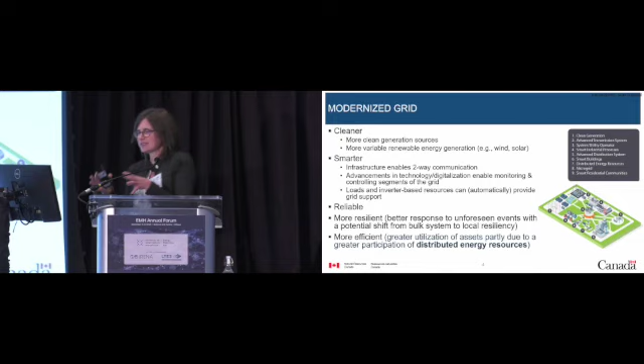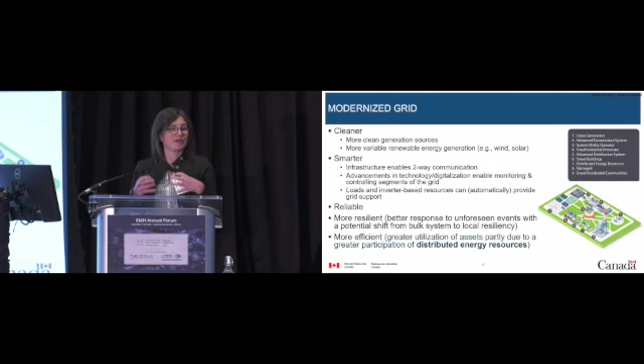And loads and inverter-based resources can not only provide grid support, but they can do it in an automated way. So the modernized grid hopefully is still reliable and we're still able to keep the power on, but it's also hopefully more resilient, so better response to unforeseen events, and maybe we shift a bit our mindset when it comes to resiliency from the bulk system resiliency to more local. And the more modernized grid is also potentially more efficient, so we have a better utilization of the assets of the network because we enable DERs to participate.

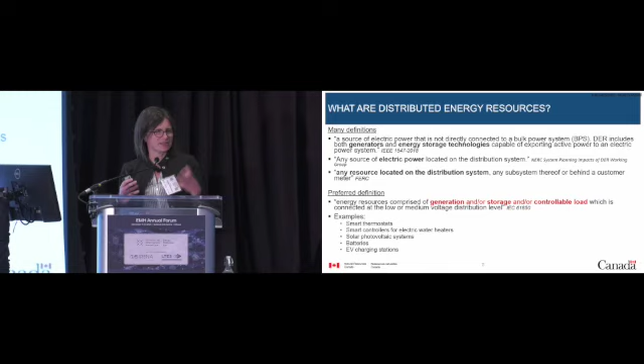So let's take a minute here to define distributed energy resources because it's not always defined the same way. So sometimes we see it includes generators and energy storage technologies on the distribution side. Sometimes it only includes electric power sources. But here what we will use as our preferred definition is any resources. So we include generation, we include storage, and we include controllable loads on the low voltage and medium voltage distribution side.

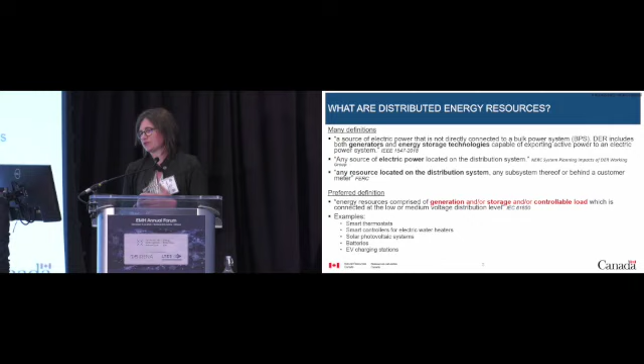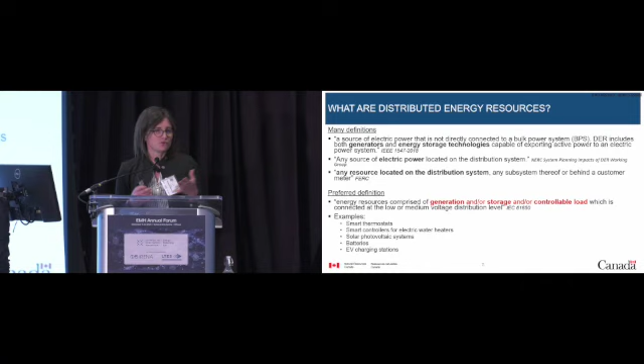So what does that include? Well, smart thermostats that control electric baseboard heaters, heat pumps, smart controllers that control electric water heaters or any other loads, solar PV systems on the distribution side, batteries, and EVs.

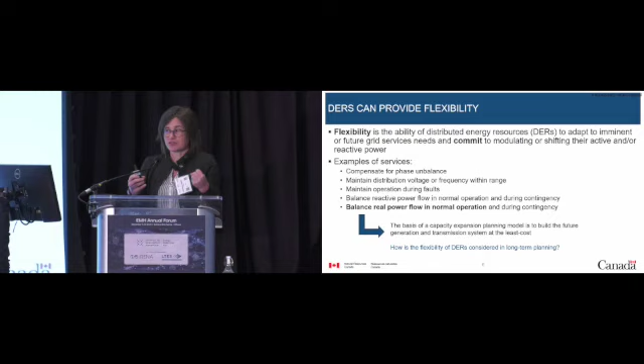And why are DERs important? Because they can provide flexibility. And what is flexibility? It is the ability to adapt to grid changes, so to grid needs, and commit to shifting the active and/or reactive power to help to provide that service. And the services are numerous. So you have compensating for phase unbalance, maintaining distribution voltage or frequency within range, maintaining operation during faults, balancing reactive power flow, and balancing real power flow in normal operation and during contingency.

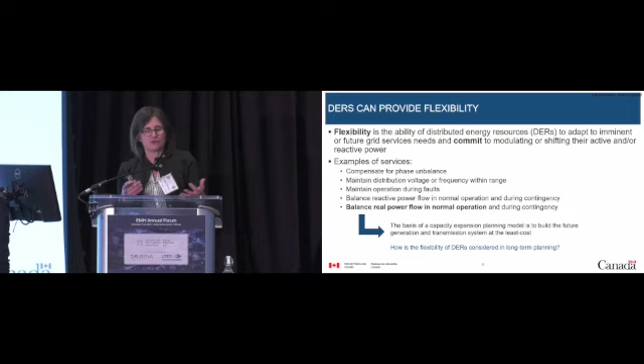And that last one is in bold because it's important, because when we're doing a capacity expansion planning model, we're actually balancing real power flow either for the full year or for certain weeks or for certain days. And we do that and we try to find the system of the future at the least cost. So if DERs can provide flexibility and can help balancing real power flow, it would make sense to try to capture that in long-term planning.

So how do we currently do it? So let's look at the three components of DERs. So starting with distributed generation. Well, right now, distributed generation, if it's significant, we'll consider it, again, by using the concept of net load, so load minus distributed generation. That net load is time and resource dependent, so it changes, but it's an input, it's static, it's passive. Distributed storage, well, if it's significant, we'll include it by aggregating it at the closest bus. And we will somewhat consider the performance characteristics.

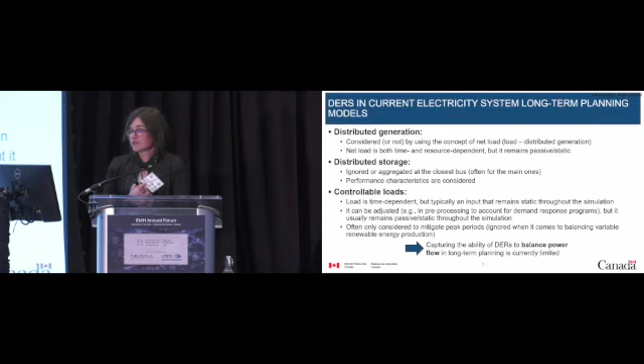When it comes to load, well, the load, of course, is time dependent, but it's also typically an input that will remain static throughout the simulation. We'll often adjust it in pre-processing, accounting for demand response, but often that will be only at the peak. We'll say, okay, well, that much demand response will help the peak, so we will adjust the load curve in pre-processing and then use that. We won't account for the fact that it can actually vary throughout the simulation, for example, to balance variable renewable energy. So capturing the ability of DER to balance power flow in long-term planning, well, it's done in a certain way, but it's not complete.

So let's look at some examples of the type of flexibility that it can give. So let me start with some examples of inverter-based resources. So inverter-based resources, on the distribution side or on the transmission side also, convert DC current into AC current, right? And they can be connected on both sides, as I just said, and they include solar PV systems, battery systems, EVs. And if we just look at the CER 2023 Energy Futures Report, of the total solar expected capacity, about 30% of that would be rooftop systems, so systems on the distribution side, right? So inverter-based resources like solar PV on the distribution side, they will be there.

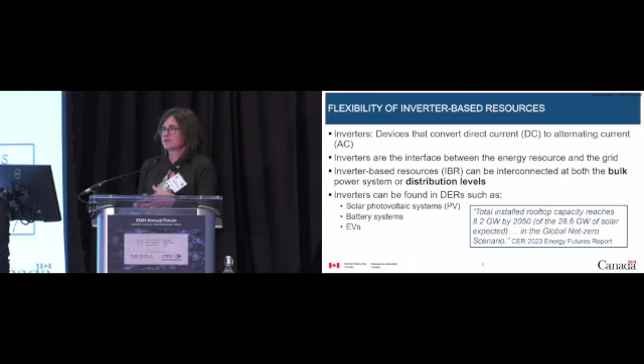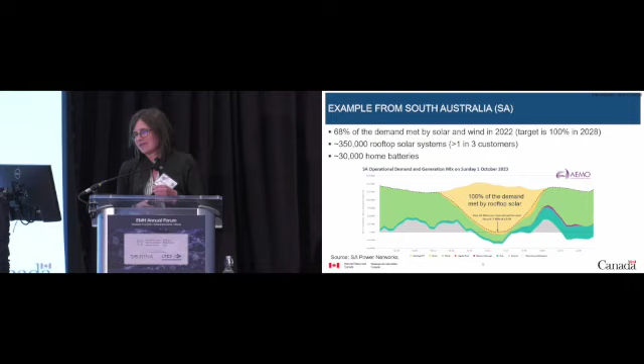So this is an example from South Australia Power Networks. So they have a very unique system. 68% of their demand was met by solar and wind in 2022. Just to give you an idea, in Canada, solar and wind combined are about 6-7%.

Their target in 2028 is to reach 100%. So they have one out of 3 customers with a rooftop solar system. So that's 350,000 rooftop solar systems and 30,000 batteries. And at 1 p.m. on October 1st, well, 100% of their demand was met by rooftop solar.

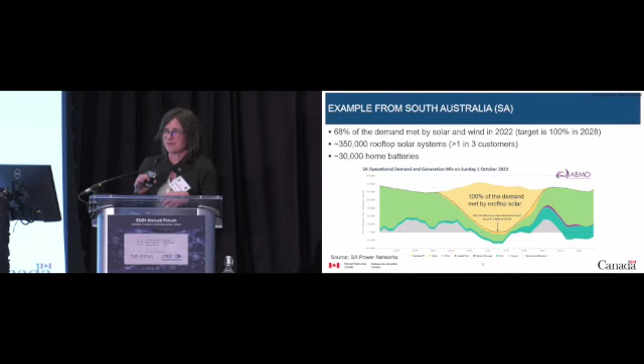And it's interesting to look at that curve because they also use the concept of net demand, so demand minus solar. But how were they able to achieve that? Because if they would have just let everybody interconnect with no limitations, let's say, they would have had congestion on their network. So to prevent that congestion, they look at different options. One of them would be upgrading their infrastructure to avoid that congestion, limiting the excess generation from the grid. So saying, you are able to interconnect, but you cannot feed more than 1.5 kilowatt, let's say, at all times.

The third solution that they looked at and that they actually went for was what they call the flexible export. Export here being feeding back to the grid. So that was basically allowing them to interconnect, but the system operator had the opportunity to, according to network condition, limit the amount of electricity that could be fed back into the grid because of smart and internet-connected inverters. So what that means is that DERs have the flexibility to modulate their output. Of course, they can provide other services, but they can modulate their output.

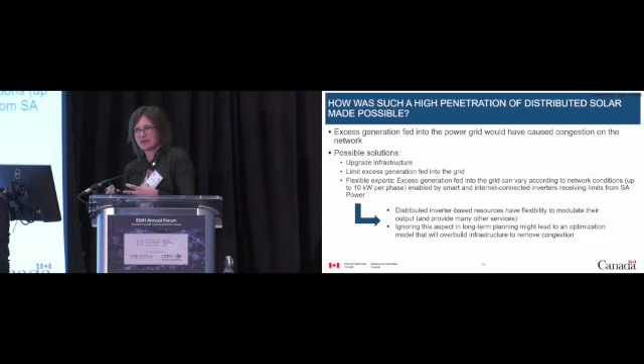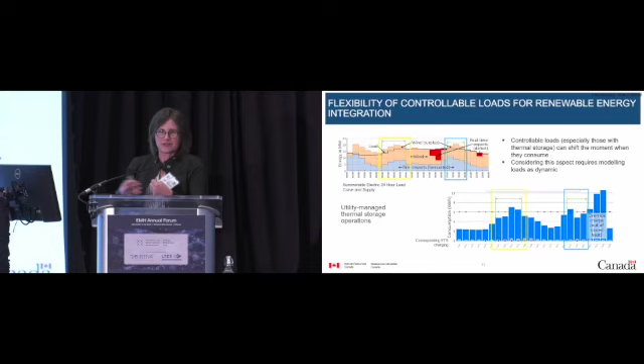So if we ignore that in long-term planning, we might get an optimization model that will want to overbuild infrastructure to remove congestion or limit the amount of PV that's being built. Another example that you've probably seen before is that one from Summerside Electric that are actually using electric thermal storage units and electric water heaters to balance excess wind. So in order to capture that, you need controllable loads. You need to take into account that these loads are dynamic. So this shows the importance of considering that, because otherwise you cannot capture something like that.

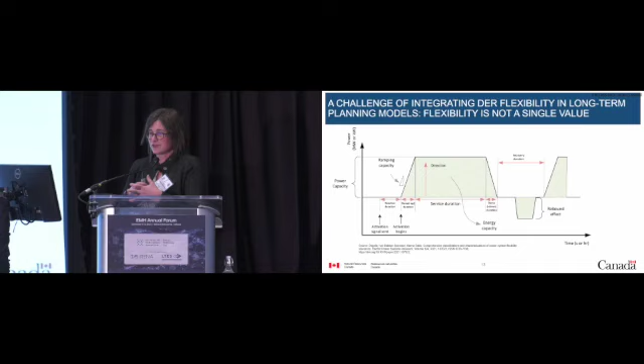So why are we not integrating the flexibility of DER in long-term planning now, or why are we doing it in a simplified way? Because flexibility is complicated. It's not one value. It's something that varies with time. Of course, your smart thermostat controlling your electric baseboard heater doesn't have much to offer in the middle of July, right? So that flexibility varies with time, and it's not only seasonal, it varies throughout the day, right? So it will need some time to react. It will have a ramping capacity. There's a maximum power that it can bring. It might have a rebound effect also, and there's also a maximum of time before it can provide the service again, right? So it's a number of characteristics that evolve with time, with season, and all that.

But if you think about it, it's not that far from how we are currently including generators and storage units in planning, right? It has a capital and a marginal cost. It has an availability that varies with time. It has a nominal power. It has ramping up and down constraints. So it's not that different than how we include generators and storage. So if we can do that for those types of assets, maybe we can do it for load as well.

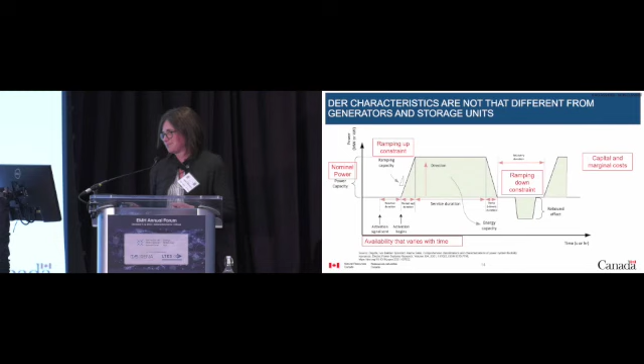So in conclusion, the long-term planning that we're currently doing is often based on the traditional grid mindset. Generation follows load. So the sum of the generation is the sum of the load plus the sum of the losses. But our modernized grid will have more DERs. So maybe it's time to shift a bit our mindset towards more of a load follows generation approach, or even better, sum of the resources equals 0. But that's not necessarily straightforward, and that also complexifies the problem considerably. So we need some methods to be able to do that in a reasonable way that doesn't complexify the problem too much. But it's still important to do it, because if we don't, we might overbuild infrastructure, or really not capture some elements that might be much cheaper than other options.

And also that mindset of a sum of the resources equals 0 doesn't only apply to long-term planning, but also production cost models, as well as operational planning models.

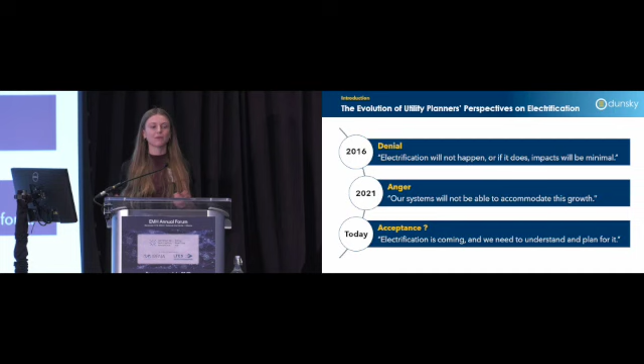And while there may be some people who are still stuck in this phase, I see more and more of our clients moving towards acceptance and recognizing that this is coming and we need to understand it and plan for it. But that also brings up many questions. What is going to be the pace and magnitude of electrification? What are going to be the impacts on my infrastructure? Where are these impacts going to be located? So this is really what I'm looking to focus on today.

And I'm going to be walking through three key insights for load forecasting practices. The first is to view load growth holistically. It's really important to capture the combined impacts of multiple technologies, sectors, and segments in order to truly understand how system fundamentals may evolve. The second is to get granular. Load impacts are not going to be homogeneously distributed across a given service territory, and we might see more imminent and more significant impacts in certain pockets of the distribution system.

And the last is to take a balanced approach, which recognizes the need to highlight the potential for unmitigated load impacts while also leveraging this to show where cost-effective investment in DERs and load management strategies could be made in order to mitigate these impacts.

So diving into the first point, it's important to really take into account all sectors, segments, and technologies, since load impacts will not be due to just one sector or segment. Even though load growth from EVs is often top of mind, heating electrification could be just as significant, particularly in jurisdictions which currently have limited electrification of heating and in colder climates.

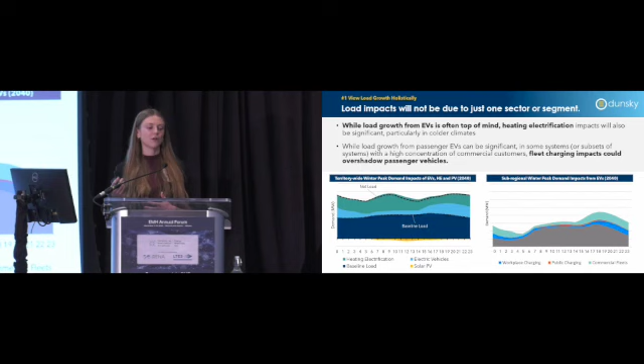And going to a segment level, we also see, for example, load impacts will not be due to just passenger EVs, but in some systems or potentially subsets of systems where we see a higher concentration of commercial customers, maybe the potential for development of large charging depots, fleet charging impacts could actually overshadow passenger vehicles.

And why it's important to understand this is really to see how system dynamics will evolve and have a complete picture. So for example, in this example here, we see the combined impacts of both EVs and heating electrification drive a shift from summer to winter peaking in this system as early as 2029. And if we were taking just one or the other technology in a silo, we might see this happening only 4 or 5 years later in maybe 2035 or even after.

And this also impacts the actual load shape. So you can see that the combined impact of heating electrification and EVs create this kind of dual peaking system with 2 daily winter peaks, one in the morning, more driven by heating electrification, and one in the evening, more driven by EVs. And this was mainly focused towards winter peaking systems, but this is equally as critical in summer peaking systems and those which might be expected to remain summer peaking into the future.

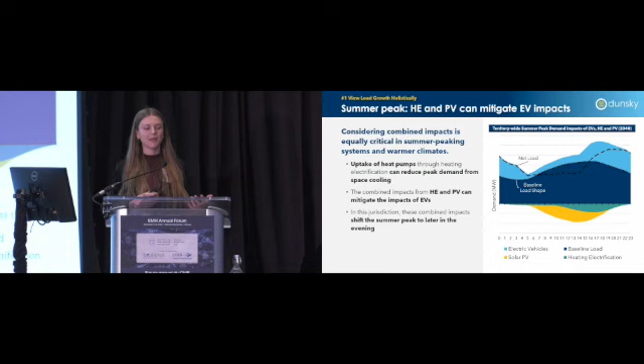Here we see that the uptake of heating electrification and PV can actually help to offset some of those load impacts due to EVs. In areas where there's a high penetration of air conditioning, heat pumps can actually provide more highly efficient cooling, helping to reduce some of those summer peaks. And PV can also supply some of the energy during the hours, of course, when you have the sun shining.

Diving into the second point, so taking into account local demographics and how these will impact the uptake of technologies and also load patterns is really important, especially at the distribution levels, to understand where these impacts are going to be concentrated. And there's sort of 3 main factors that we see driving the distribution of these technology uptake and load impacts within a service territory. The first being the kind of obvious one, so that is the actual market size and composition, for example, the number of residential versus non-residential loads and customers.

The second is actually market saturation, where in areas where there's already an existing higher penetration of these technologies, it can drive a faster uptake of additional technologies in the future due to networking effects. And the third is general market characteristics that are correlated with adoption propensity. So this could include income levels, or if we take the case of EVs, housing type, where customers that are in areas with a higher concentration of single-family homes are more likely to see earlier adoption of electric vehicles since they have easier access to garages and to install charging infrastructure, whereas we still need some policy support to catch up for the multifamily homes and garage orphans.

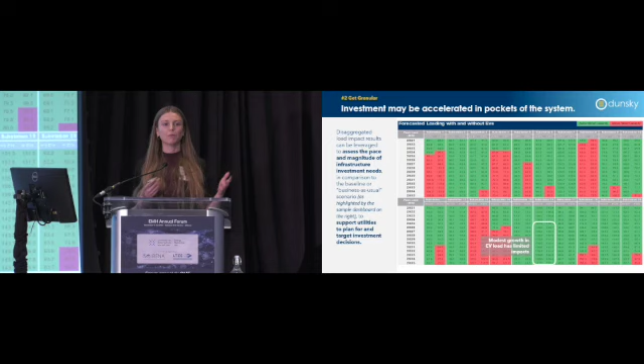However, if you're looking at investing in that substation, you might want to future-proof it for the additional loading that's expected in later years due to electrification. And then finally, as I mentioned, just due to demographics and specific load patterns, there may be some areas where we don't see a significant impact due to electrification. And this really helps planners to assess both the pace and magnitude of these changes while also seeing where they need to target their investments and make decisions.

This brings me to the last point, which is about, again, this balance between needing to both understand the unmitigated load impacts while also considering flexibility. So, our work and work that we've seen throughout the couple of days and throughout many different electrification and net zero studies show that, if unmitigated, particularly peak demand impacts of electrification will be significant, both system-wide or in more localized hotspots of the system.

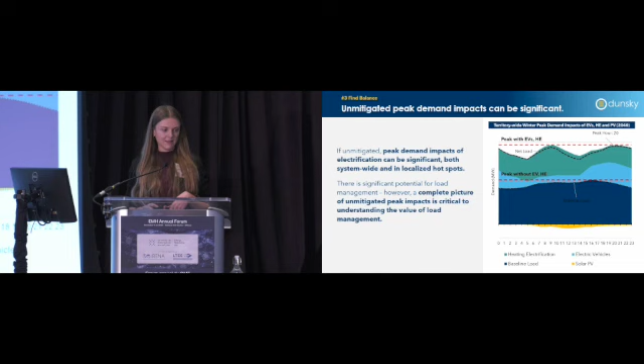And while this may not always be something that planners want to see, there's value in seeing this versus simply embedding load management into your forecast from the beginning, because this can really give a complete picture of these potential impacts and the potential investment that might be needed if we don't invest in cost-effective alternatives like demand response and other DERs. So on the other hand, we don't want to present only unmitigated impacts.

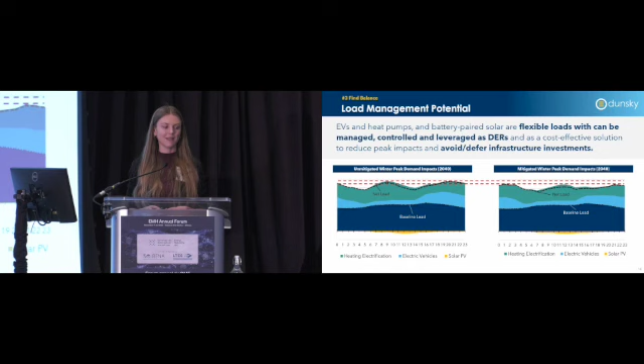So just to recap on these three main points, it's really important to consider load forecasting practices which are both holistic, so capturing the combined impacts of multiple technologies, sectors, and segments to have a complete picture of system dynamics, such as changes in peak season or changes to the load shape. Second, it's important to consider granularity. So load forecasts with a granular distribution of impacts can highlight the non-homogeneity of these impacts and support in planning investments at both the right place and the right time.

And finally, having a balanced forecast which highlights both the potential for unmitigated impacts while also considering the potential for load management is essential for highlighting opportunities for cost-effective investment in DERs. And essentially, all of this taken together can empower utilities with valuable insights as they're looking to understand and plan for the realities of electrification and really making these investments and decisions in, again, the right place at the right time and choosing the most cost-effective solutions available to them.

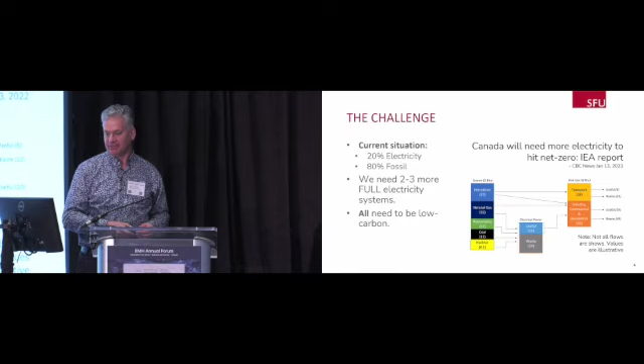With that, and we've heard about this as well, I feel like I'm a little bit repeating what's happened in previous presentations. I might go through my part a little bit faster, which I think, since we're a little late anyways, will be fine.

So, challenges integrating variable renewables: ramping concerns, shorter peaks. There's issues with forecasting. With a coal plant, you can forecast that you can turn it on, run it, and then turn it off. With VRE, you can turn it on, and then the wind may or may not be blowing, so there's a challenge with forecasting. And then also, as we build out large amounts of VRE, there's network congestion issues. We might have a huge amount of wind in northern BC, but that transmission line just isn't going to get it where we want to get it. So how do we deal with those different pieces?

So there's challenges with integrating these variable renewables, and challenges with figuring out, as the previous speakers have talked about, how do we manage the load as a distributed energy resource? How do we forecast how that can work? How do we get those tools in place? How do we get the technology in place to piece those pieces together? The nice thing about all this is that there's good job security, but the bad thing is we've got to solve these problems, hopefully soon, because my daughter and future generations really need this. We need to succeed with this to be able to get these things figured out.

Most of what we've talked about is energy, but it really fits into the bigger sustainability question. So number 7 is energy. I assume everyone's seen the Sustainable Development Goals, but the interactions with all these other pieces is really something I'm interested in: how do we figure out how to move things forward, how do we model how to move things forward effectively while not causing issues in most of the other ones on this list? So figuring out 7, but then pushing a whole bunch of people into hunger and poverty, I'm not really interested in that. How do we do this in a holistic way where we look at all these different pieces and put them together so that all of this moves forward effectively?

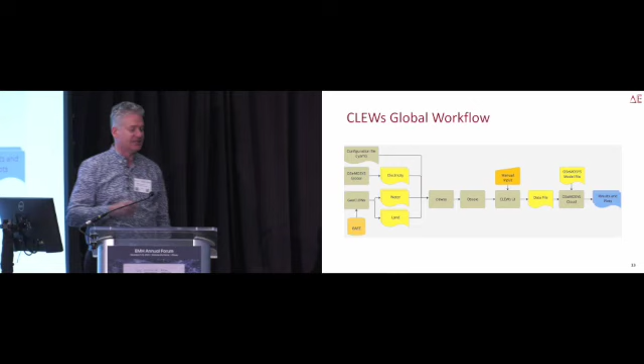And then looking at equity and justice as well. So CLEWs is the land and energy water system, but some of the pieces that come out of that are the justice implications. If food prices go up, that's going to cause people to go into that no poverty, no hunger SDGs area and become challenging. So we've got this paper under review, hopefully published soon, about equity and justice in modeling. How do we bring those pieces together? How do we bring the modeling community and the planning and justice and energy transitions community together? How do we talk to each other? We had some really interesting meetings where we talked for an hour and realized we were actually talking about the same thing, but we had to find the same words to get there. So some of that is connecting those pieces together.

And then we get down into the electricity system, substantial modernization required. We've had lots of discussion about this already as well, so I'm going to go through this relatively quickly. But basically, shifting from the current grid, where things are basically unidirectional, into a smart grid where we have these distributed resources that are contributing when they can. How do we piece those pieces together?

I do a bunch of work internationally, in-country development workshops in a number of places. In January, I get to go to Guyana and Brazil, training and mentoring faculty at these institutions, and working with local communities to build the models for their analysis so they can do it themselves. It's not consulting where I charge them for modeling and then charge again for the next analysis. It's about helping them build the tools and structures so they can do the modeling for themselves.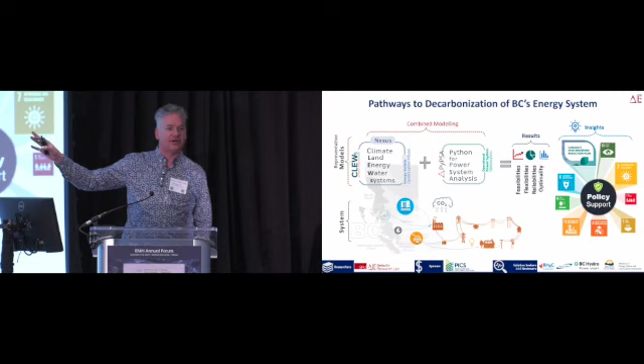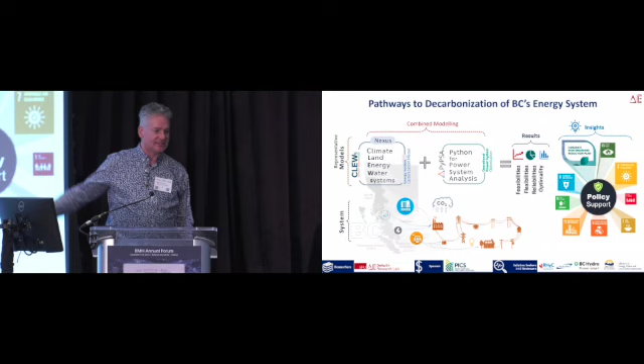Now we're going to focus down a bit to get things ready for Pierre. Looking at decarbonization in BC, we've got a CLEWs model for BC and a power system model for BC, and we're linking those to have capacity expansion, looking at land and water, and deep into how the power system actually operates, to get some good policy support for BC. I'm now going to hand it over to Pierre to talk about one specific piece of what we're doing with BC.

Thank you, Taco. I'll provide a bit of a lightning talk on some of our work on modeling in BC.

First of all, we use PyPSA-BC, a model built using the Python for Power System Analysis, an open source toolbox for simulating and optimizing modern power and energy systems. It's a model of BC's energy system used to simulate the optimal dispatch and use of BC's energy assets, allowing production cost modeling at an hourly resolution to better understand the usage of investments from BC Nexus, our capacity expansion model built from the OSeMOSYS framework. However, we can also perform capacity expansion for a limited time horizon in PyPSA-BC, which will be the subject of today's talk, to understand the optimal portfolio for a given scenario.

So at this year's annual forum, we've brought a preliminary study of EV integration under various EV penetration levels and different charging strategies using PyPSA-BC. The objective of this project is to identify the generation resources required to enable fleet electrification, and to investigate the challenges and opportunities of fleet electrification.

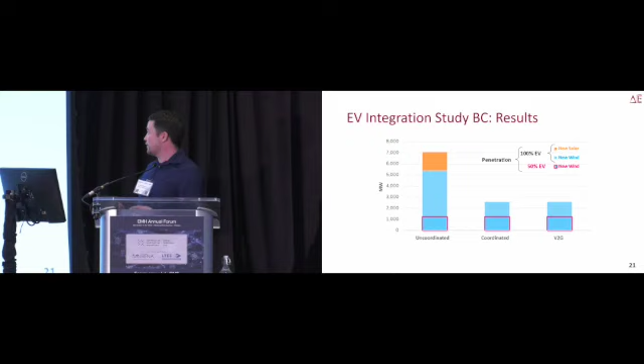One thing to note here is that in this model we don't take into account behavior. Not everyone is going to necessarily charge when we want them to, even though from the modeling perspective we do model it as an endogenous variable that the model can pick. So some further research is going to be needed there. But still, there's quite a large gap, even if some of that's closed by behavior.

Looking into this a bit more, I think the net load duration curve is good data for understanding what's happening. Looking at the coordinated and V2G cases, the net load duration curve here is the difference between load, subtracting run-of-river, wind, and solar assets, and in the case of V2G, also subtracting the discharging of the vehicles. The net or residual load must then be dispatched from dispatchable assets, which in BC are predominantly hydroelectric reservoirs. We see in the coordinated and V2G charging scenarios they benefited by shifting charging from times of high net load to low net load. We also see from the correlation that the timing of VRE production becomes more aligned with charging in the coordinated and V2G cases, and the investments here are predominantly made in the Peace region of BC.

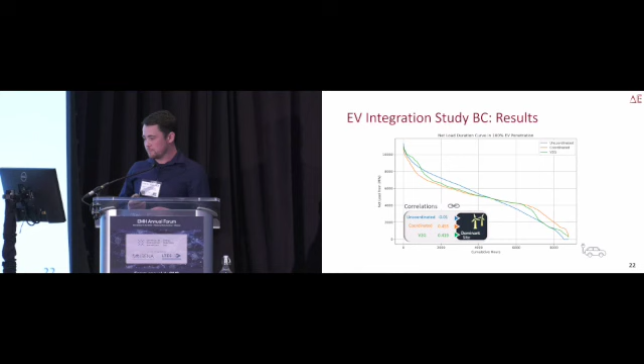A few takeaways from Taco's part for our group. It's really about having open data and being transparent to allow decision makers better access to our assumptions and what our models actually can say and can't say. And then also trying to involve larger breadth into our model and be focused outside of just energy, but also including climate, land, water, and equity.

And from the EV integration study, there's really just 2 points. One is in our particular case, we found that coordinated charging offered all the benefit compared to V2G, and then we also saw there definitely is a benefit in coordinated charging as compared to uncoordinated.

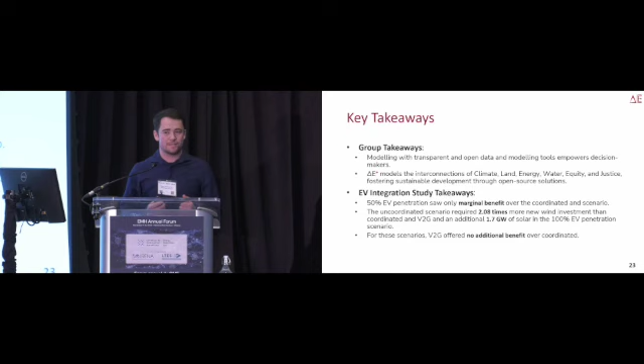So thanks, Pierre, for the presentation. So we're going to move now to the fourth presentation, the last one for this session. So I'm going to invite Mrs. Carolyn Calwell, so she will give us some information and some focus on the implication on financial dynamics for the distribution network transformation. So welcome.

Thank you so much. It's a privilege to be on this panel with my co-panelists, and it's a privilege to be here today. I come to you as the economic regulator of the electricity and natural gas sectors in Ontario. I am very comfortable in policy spaces. I'm really unfamiliar with modeling spaces, so I hope that the remarks I have for you today have some meaning for you.

And what I thought I would do is put the Ontario system in context, in a policy context, and then talk about how we get a distribution system to show up. What does it take to have the distribution respond to the challenge that we have ahead? So let me start with that. At the OEB, we think about the pieces of the policy puzzle. And the first real one, in terms of chronology, was the IESO pathways work. And I know this conference has talked about that a few times over the course of the last 2 days.

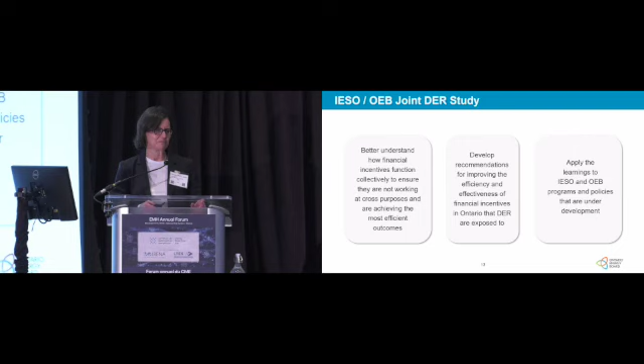And if you participate in the joint session between the OEB and the IESO on the DER front, then you've heard about this work before. But it's getting close, so I'm excited about it. You may also know that the OEB recently, earlier in 2023, introduced some new incentives to try to encourage distributors to bring more DERs to the table.

And what we've tried to do with these mechanisms is say, hey, tell us how you would like to be remunerated for them through either a performance-based mechanism, a savings sharing mechanism with customers, or a margin on costs. And so if the traditional rate setting mechanism doesn't work for you, look at these and give us a proposal. And we'll work with you to try to make it work for you.

So that's where we are today. But I think everyone knows that it is lacking. There needs to be more. So what do we know that's next?

Well, immediately, we at the OEB will be looking to the Electrification and Energy Transition Panel, the work headed by David Collie. And I think many in Ontario are very interested in that work and where it looks to DERs and to the distribution sector to respond to the challenge. It will be interesting, I think, to see whether that work picks up some of the openings, I would suggest, that the IESO left in its Pathways report and that the province left in its Powering Ontario's Growth report.

And I also wanted to mention some work that's happening both at the OEB and at the IESO on distribution system operating models. And it seems some days that everybody's talking about this, and it seems some days that this is the only thing that people are talking about. But I do point to this because I think as we think about how the distribution sector can respond to the challenge that we have ahead, this may be one way to get more assets to the table, to take advantage of some of the resources that distributors can bring.